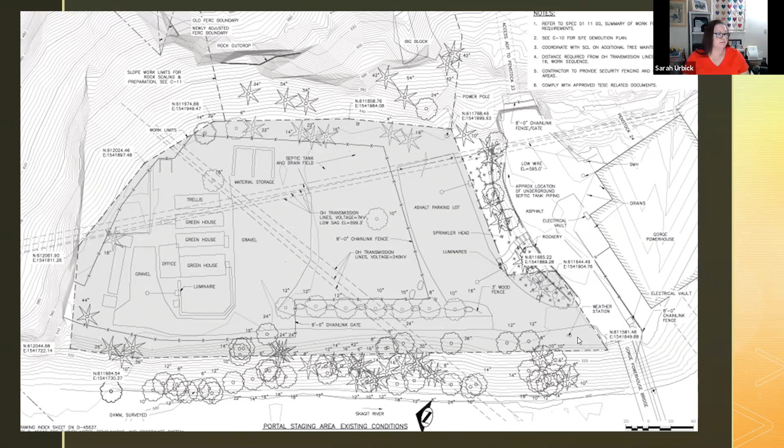All right. So I just have a quick question. I keep happening to notice that there's shading sometimes underneath on the map. So does that convey anything? It can. It definitely can. We'll look at a variety of maps. If you have one particular in mind, let me know. Let's try and bring it up, and we'll talk about that one on the screen. Okay.

Talking about visual concepts, it's really hard to do this 2-dimensionally, right? But this is ultimately what we're doing. We are taking an existing structure, an existing geographical formation, whether it is a parcel, whether it is a mountainside, whatever, right? We're taking it, we're slicing it into these pieces, kind of like a layer cake or a tiered cake, right? Cutting it into pieces every 100 feet.

We're going up and cutting off another slice and saying, what's the area right there? Where is that spot? And then by compressing it into 2 dimensions, that's what we get: we get a topo map, we get our topography, okay?

As we looked at last week, I don't have any notes on my slides for some reason this week. We started out looking at this one at the end of last week's class session, okay? What information are we getting from this? What do we see? Looking up above, it's pretty easy to see. Yeah, we've got a hillside, we've got a kind of a gradual slope, we've got a steeper slope.

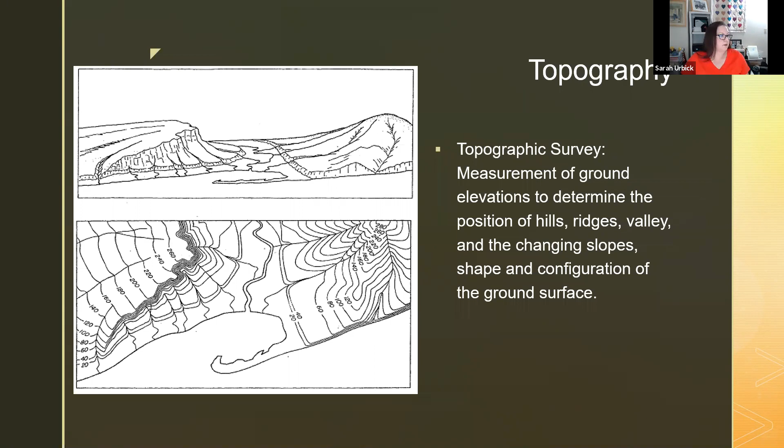All right. Contour lines, they will always connect points of equal elevation. Contour lines will never cross each other. You will have major and minor contours. Major contours, if you have to take anything out, you take out the ones in between, but you've got to have those big bold points so you have your frame of reference.

Not every topo line will have to be numbered. You won't have to put a call out on every single line, but you do need to capture the big points, right? There might be a point elevation that's worth noting, depending on the scale of your mapping.

Okay? And we want to know features of interest. Do we have a depression? Do we have an outcropping? What are we looking at? Is it a hill? Is it a slope? What do we have going on? Is it a depression? All right.

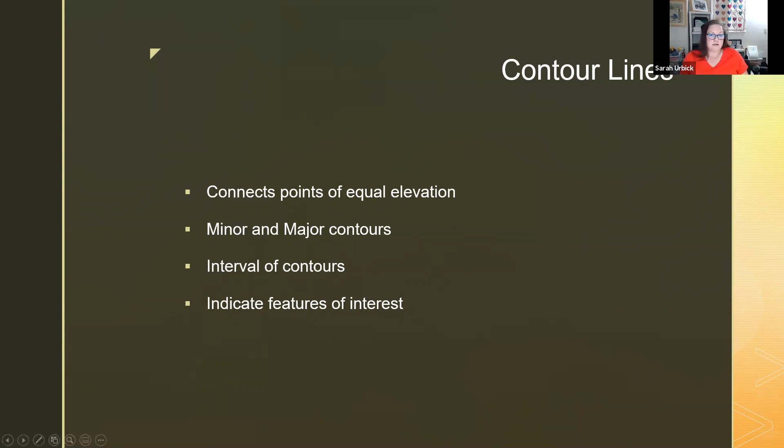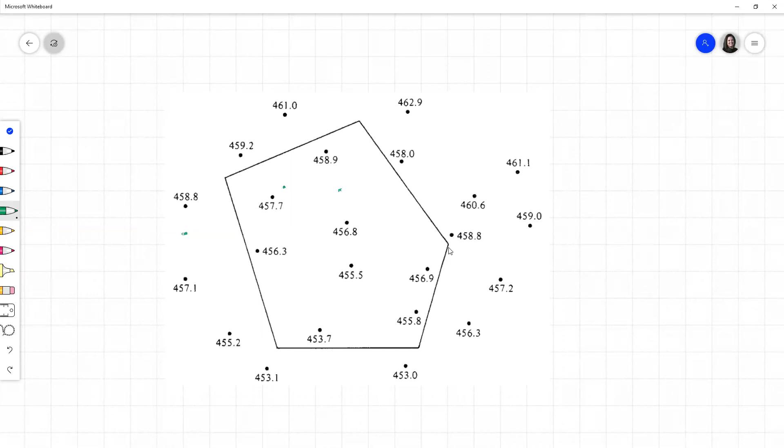And again, oh, no. How come you guys didn't stop me? I was on the wrong side of it. I was going to say that something doesn't make sense, but sorry, again, wasn't sure. I'm human too. We all make mistakes.

So it would actually be down in here, probably a little closer. 57, 58-ish right there, maybe. All right. And then somewhere between 57.2 and 59, that's probably going to be pretty close to the middle. All right. So I have my little lines.

Now, you guys have seen me draw lines. I can't draw a straight line to save my life. Let's see if we can kind of sketch in a curve using this technology, okay? So I kind of want to come in here, hit this green point, hit that green point. I have to come up and tag that 458. Oops. Okay. So this part's a little wonky, but you get the idea, right? So we've got one contour line in there kind of roughed in.

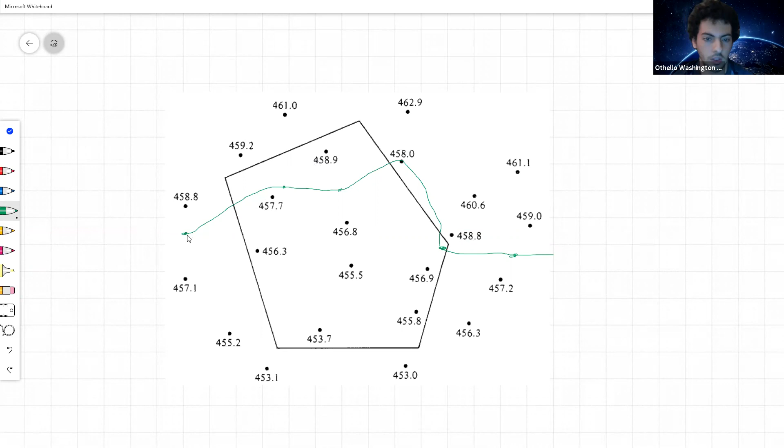So which way do you guys want to go? Should we go to 457? Should we jump to 454? What do you guys want to do next? I'd like to go down to 457 and just see how that works with the other contour line that we already created. Okay, so I'll do another one in red.

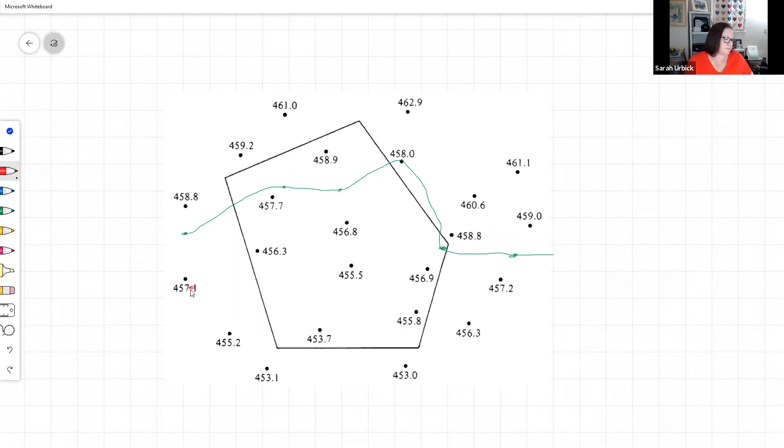All right, 457. Well, here's 457.1. So I would say if this is 455.2, we're going to be right about in this area between those 2 points, right? Similar here. So 7/10, 7/10, that's right in between. So we'll hit our 457 right there.

So here we'll start trying to connect these points. That was a little better. Okay. So now we're starting to see some finer detail emerge. This isn't just a big, nice sheet where everything's all at the same elevation. It's not all the same contours, right? It's not a nice flat plane from the side, right? We're starting to see that there's some undulations in it. There's some movement to it.

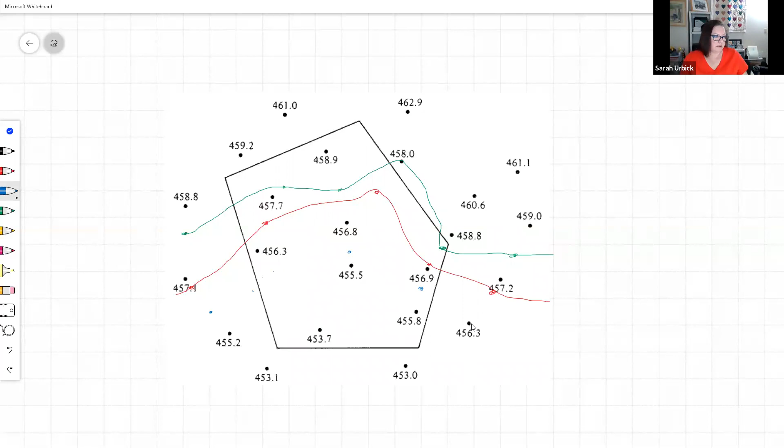456.8, 455.5. So we're going to be just a little bit closer down here. Put the dot there. About one whole foot in between these two. So about midway probably. Okay. And again, we're going to be pretty close to this 456.3 since the next one is 453. And if we look here, there's 2/10 to 456, and there's 3/10 to this point. So again, we're going to be kind of right in the middle.

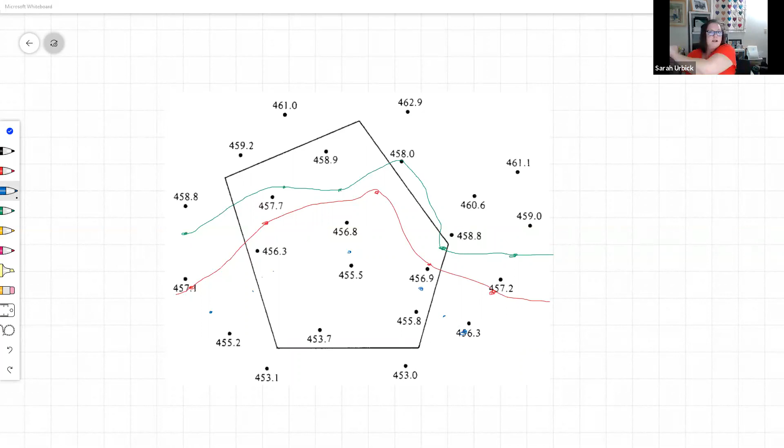So how many of you have done graphs with Excel? Probably most of you, right? Okay. So you can smooth out the line. You can hit every single point and you get this little jagged line. Or you can tell Excel, kind of interpolate for me, make that a nice flowing line. That's what we're trying to do with these points. We're just trying to smooth them out, except we don't have Excel to do the graph for us.

Okay. So let's connect these points coming in, sweeping. There we go. Rough and dirty. So again, my artistic skills are seriously lacking, but you get the idea. You guys want to do another one? Just giving you ideas on what we're doing.

Is it possible to do 453? Well, let's do 453. I think it is impossible with this set of points because we don't have more than one dot to connect it to, right? Since we just have the 1 point, let's just look at any 2 points. Between this point here and this point 453.7, let's go hot pink here, my dot's going to be right here. 456.3, 453, our elevation of 453, still right there. So right now, all we have is a point, and we know that things are headed that direction. That is our lowest point on our data set, okay? Our highest point here at 462.9.

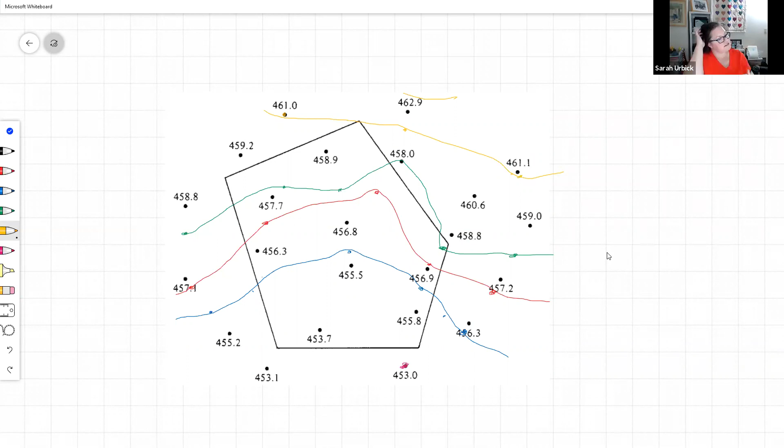Contour lines always come back to themselves, right? And it's a hard concept to fully grasp, because you're going, wait a second, we have lines that run off the page. Well, theoretically, that elevation doesn't go away, right? They're usually closed loops when we go out and we survey, because we're taking slices out of the earth. It might be a giant loop. It might be absolutely enormous.

Whether that loop closes on the page, or whether it's off the page, off the map, that contour still exists, right? That line in space, it's a flat plane. And anytime you cut something, no matter what angle you cut it at, that cross section is always going to be a closed object, right? Any questions? You guys want to do another one of these? Another contour? Or does my chicken scratch scare everybody?

No, it looks good. I was just wondering, what's the significance of the shape, this polygon in the middle? The polygon in the middle, that would be our traverse. Okay. So if we went out and had our setup and had our traverse to go back and find these points, that's just kind of like our control point. Does that answer your question? Is that what you were looking for? Yeah. Okay.

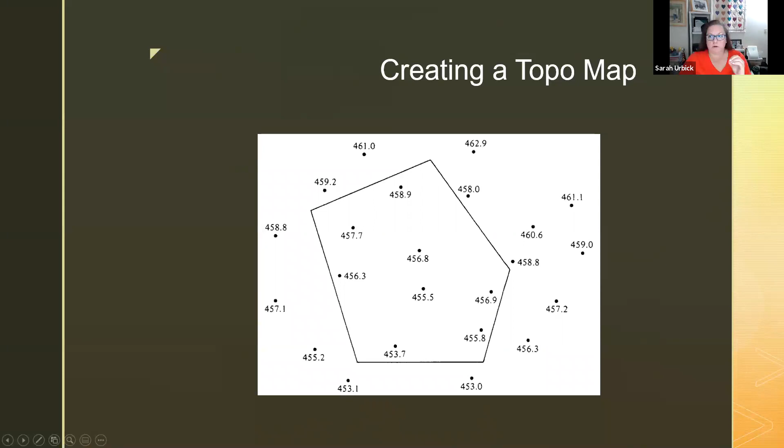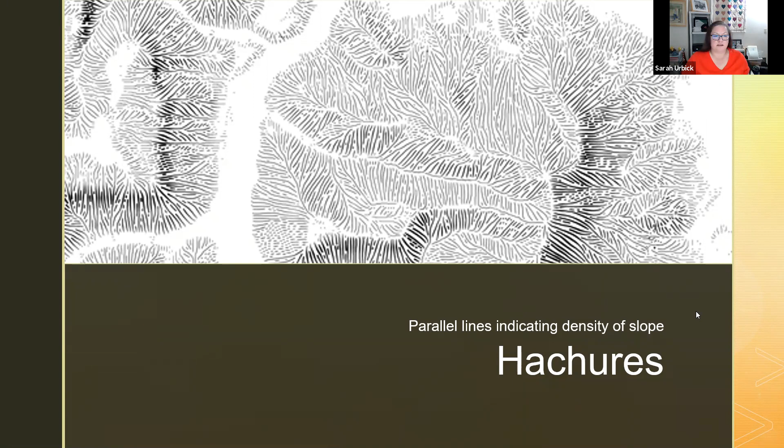You knew slope was going to come back to bite you in the butt, right? That's why we kept going over it and kept going over it. Slope percentage, slope ratios. How do we define what's happening to that piece of land? So what are our knowns? What do we have? The change in vertical elevation. That's what topo lines are. That's what our contours are. Horizontal elevation above a datum, right?

The change in elevation is 10 feet as defined by our contours. We know what our scale is, and thanks to that handy dandy chart that we had from last week, we also know that that's equivalent to 1 inch equals 200 feet. We know what our change in horizontal is. We measured it 3/4 of an inch. So how do we find the slope?

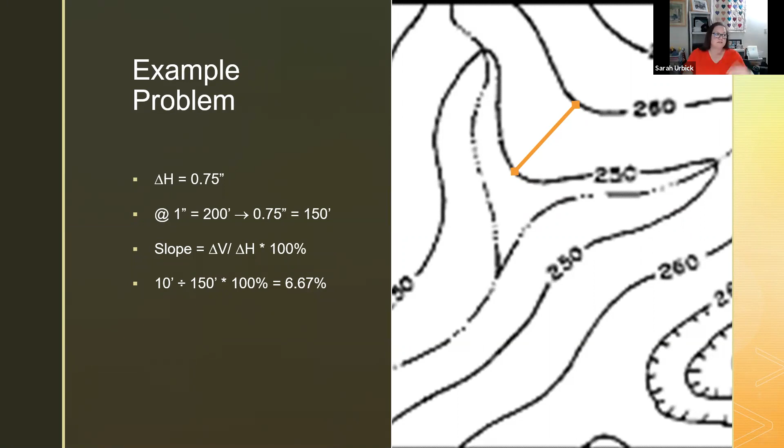That's mostly what we would be doing with these kinds of problems, these kinds of contours. What's the slope between this? If you measure from here to here, what's the change in vertical elevation? Okay. Little word problems that we would end up getting into. Topo maps and topography maps, they can be large, medium, and small scale. Now, this is where it's going to be a little bit confusing, all right? So let me get to my notes here on this particular one.

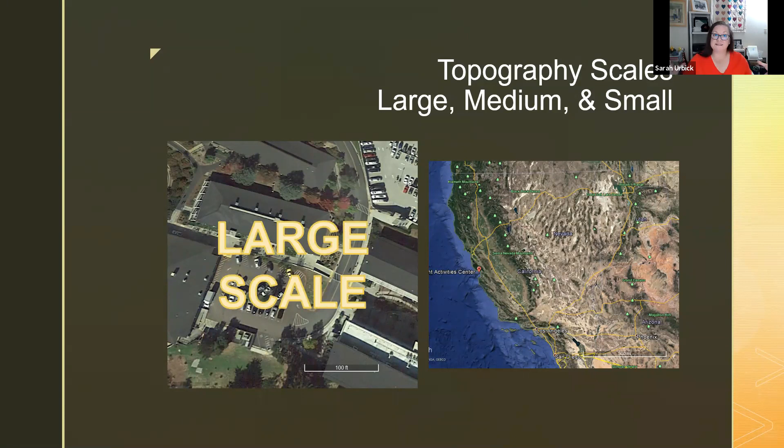So we have our large scale here on the left, where we're zoomed in, versus our small scale, which is when we're zoomed out. So the difficulty here is you're looking at a much larger area, but the scale really is much smaller. Does that make sense? That one took me a little bit to kind of wrap my head around. Okay. So the three things you want to remember here: small scale, 1 inch equals 1,000 or more. Large scale, 1 inch equals 100 or less. And medium, right in the middle. Everything else. Okay.

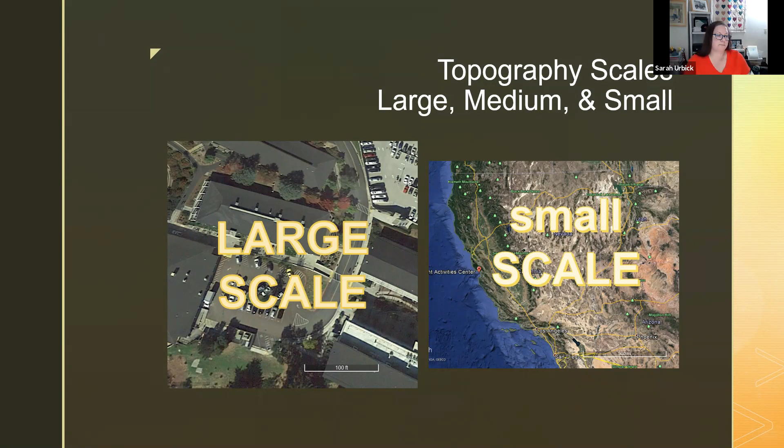Generating topographical data. So far what we did, that first problem, drawing in the contour lines. Somehow we've got to go out and get that data. This time we were given that information, those sets of points. Couple ways of going about it. There's a direct method and an indirect method. Direct method is I go out and I set up, I take my rod and I look for those points that are exactly the contour elevation that I'm looking for.

So if I were standing on that hillside, the one we were looking at, 400 versus 450 something feet, and I wanted to go find that exact line, I could go out, set my rod, take my reading, and come up with an elevation of 457.7. Okay, well, if I'm trying to find 458, I know I've got to go up the hill a little bit more, but how much more? It really is the trial and error method, finding the direct elevation.

It's very convenient. It's very, very easy to draw your topo lines off of that, because all you've ever recorded are your whole foot increments, right? Or your 10-foot increments when you've mapped those out. So you take your position, you take your direction, you locate that point in space. Now we're locating the elevation of it. Now we found that spot. Okay. Direct method, very rarely used anymore. It's too time consuming. It's too cumbersome.

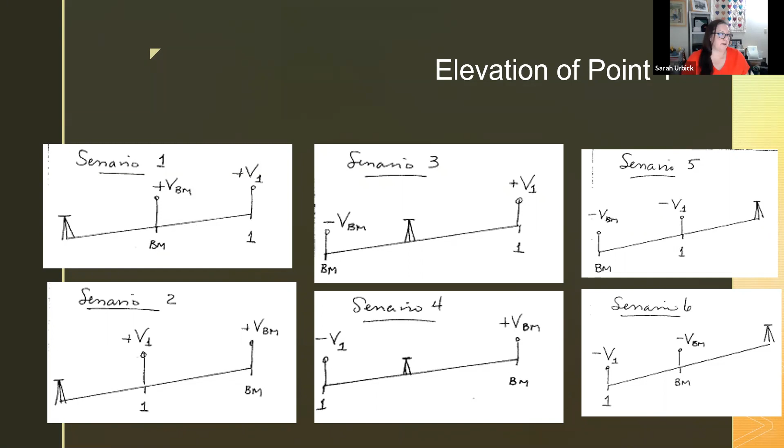That's really it, right? So what we're going to do instead, I'm not going to do that. The evil gears in my mind were starting to spin. I was going to just say, all right, scenarios 2 through 6, that's your homework, go. We'll walk through scenario 1. We'll talk about it, and we'll see if you guys want to continue on that. All right, so for now, let's go look at scenario 1.

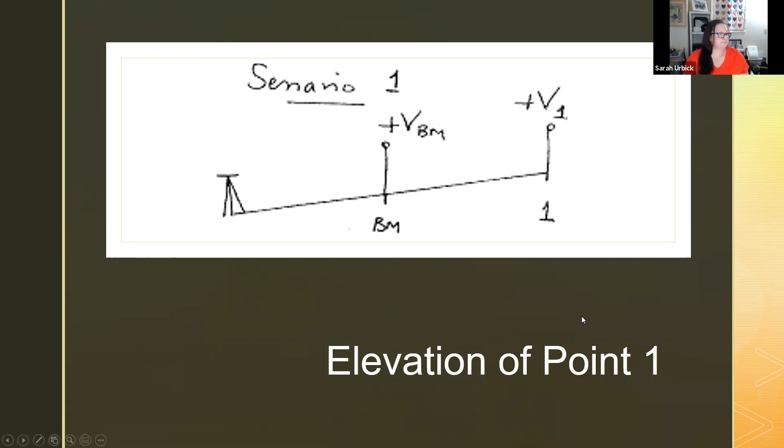All right, how do we find the elevation at point 1? What are our formulas? What's the math? All right. So we draw it out. HI is what? Okay, you're all going to have to chime in here. Height of the instrument. All right. Awesome. Okay. So we've got our elevations. RBM. What would that be? Logically, what do we think?

That'd be foresight benchmark. Reading at benchmark. Yes. Yeah, so that's going to be the reading at the benchmark. Okay. Actually, it's not the reading. It's the rod height. So the way this was set up, it's a little bit odd. So the rod at benchmark and the rod at point 1 are actually the same.

Okay. V at our benchmark, that's going to be our change from the top of our rod down to our reading. V1 is the top of the rod down to the reading. And what we're trying to find is this elevation 1, okay? It was a little bit funky, but the math ends up working out, okay? So if that were the case, what would be the formula for finding elevation 1?

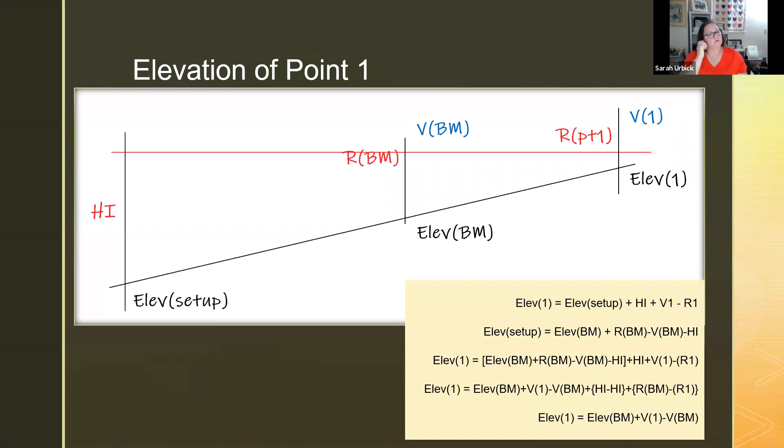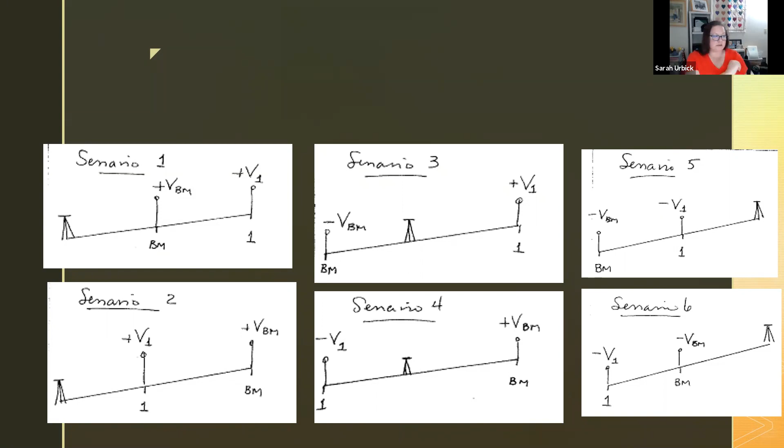What we were going to do was have breakout groups. We were going to go through and prove the formula. Now that we have 5 people, not going to work quite so well. I was really hoping to get the breakout groups going. But since we don't have that, do you want me to walk through some of these other scenarios? Or do you want to take my word for it that the formula for the elevation at any point is the benchmark plus the reading at that point minus the reading at our benchmark?

Whether our instrument is on the uphill side, our benchmark is in the middle, whether our instrument is in the middle and our benchmark is at one end and our point is at the other. If you want me to prove it, we can prove it. If you want to say, yeah, I'll accept it, we can do that too. What do you guys want to do?

There's some posts in the chat about doing one more and possibly number 4. Why am I not seeing that? Thank you, Marcine. Wait, we lost somebody. Oh, John. John disappeared on us.

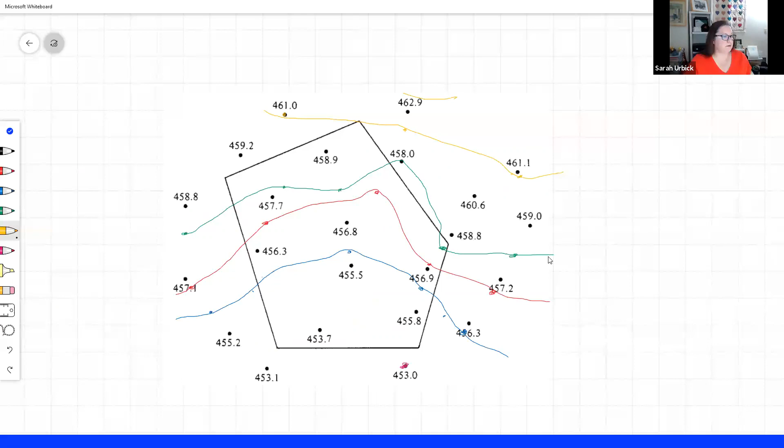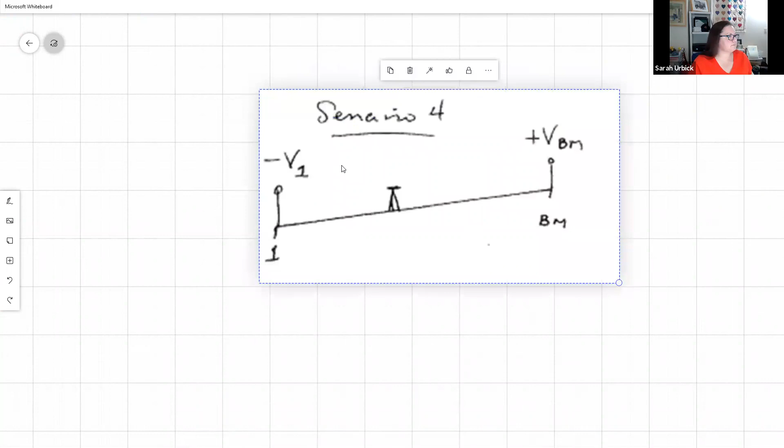All right. So scenario 4. Well, that sounds like fun. Let's grab scenario 4 and we'll just paste it on over in our whiteboard. Oops. Yeah, I'm one of those people, I don't clean off the whiteboard. All right, so scenario 4. So do we need to draw the lines, or do we want to start with formulas? Let's draw some lines. I'll use red so it stands out.

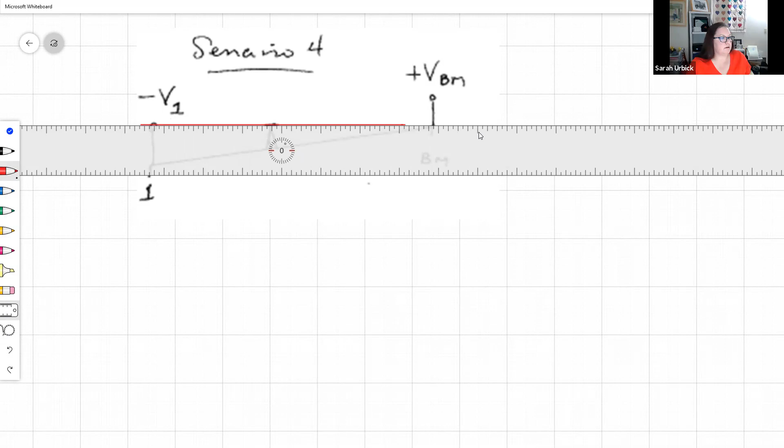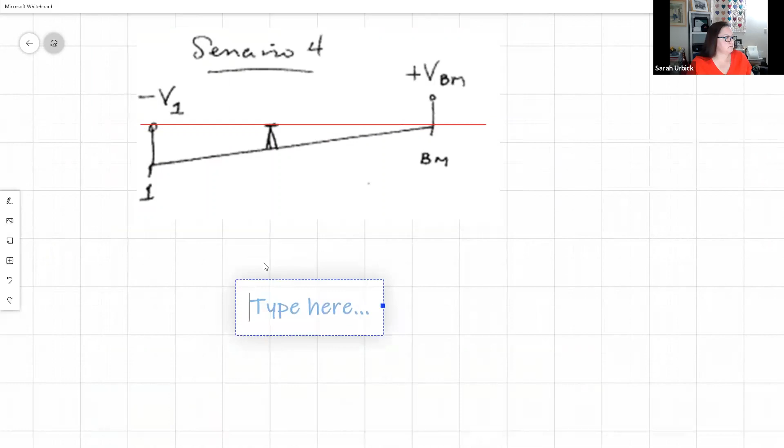So I have my height of instrument. So all my sights are going to be based off of that, right? All our readings. Let's see. I don't need to label everything here, but if I do this, oops. Why can't I get my text? There we go. All right, so our elevation, I'll just call it E1. We need our elevation at our benchmark. We have our reading at 1, our reading at our benchmark. What else do we have? We have our height of our instrument.

And then we have rod 1, rod benchmark, reading 1, reading benchmark. Okay. So let's put those in some semblance of order here. What we know is that our elevation at 1, we don't know the height of our instrument until we solve for it. So do we want to start with our elevation at 1? Do we want to start with our elevation at our benchmark and work backwards? Let's start with our benchmark.

Okay. So our height of instrument is what? It's our elevation at our benchmark, going backwards, right? So if we follow the path, starting with the elevation at our benchmark, we add the height of our rod, right? And here we would, hang on, we would subtract out the reading at our benchmark to get to this elevation, right? To get our height of instrument. You guys with me?

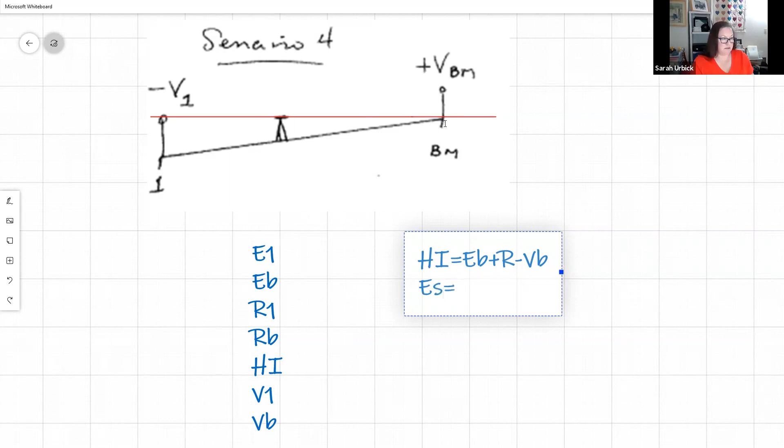Okay. So once we have our height of instrument, this one's a little bit tricky because if I use this drawing, reading the drawing, it's a little bit rough, right? So since we're dropping down, we want the elevation at our setup is going to be what? That's our height of our instrument. Is negative height of our instrument, because we have to drop down here. Actually, no. Sorry, okay. You had to pick number 4.

So this elevation, sorry, at 1. Hang on, what the hell? Elevation at 1. So we have to go up the distance of the rod, we have to subtract out our reading. And then subtract out... you guys are leaving me hanging here. It's not right either. Here's what we're going to do.

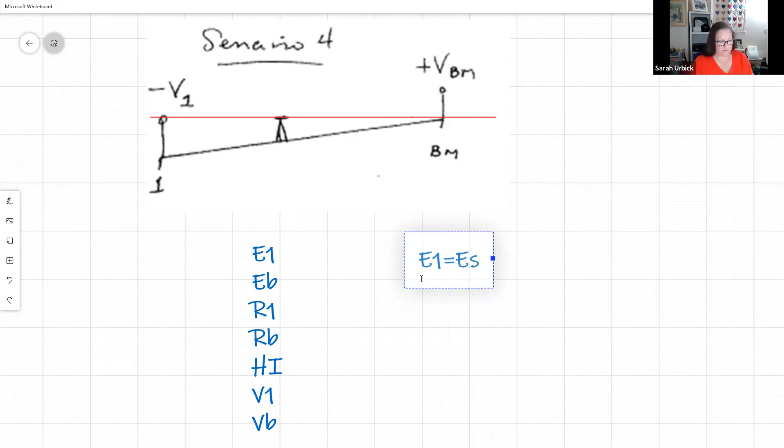Elevation at 1 is our elevation at our setup plus the height of the instrument minus the rod height. And this is showing that we've got a negative reading here. So we're going to subtract out a negative value for our reading at point 1. Okay.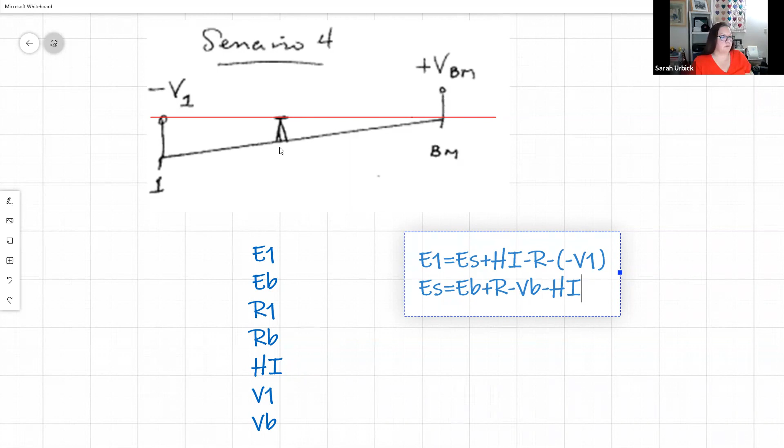What's the elevation at our setup? So where we have our instrument, right? It's our elevation at our benchmark plus the rod minus the reading at our elevation, our benchmark, minus the height of the instrument. So the elevation at our benchmark plus the rod minus our reading minus the height of the instrument. Just following that line and subtracting it out.

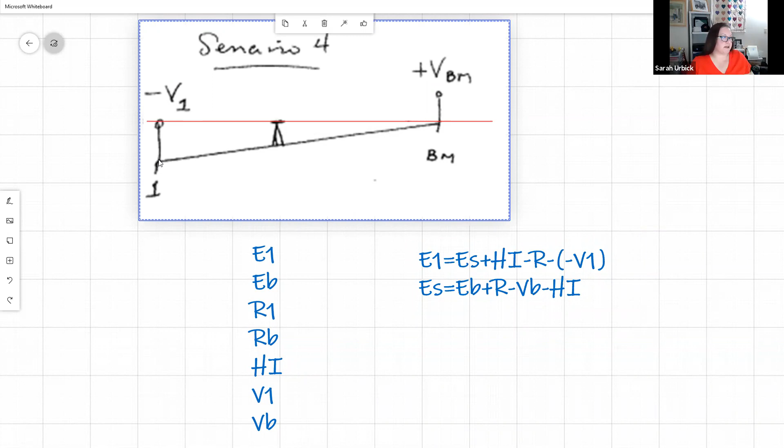But our elevation at point 1 is the elevation of our setup plus the height of the instrument, subtracting out the height of the rod and subtracting out the negative reading at that point. So we'll do our substitution. Our elevation at 1 is this, the elevation at our setup, right? Plus the remainder of that equation. I'm going to copy this down on this next line.

So let's do a little reorganizing. So subtracting out a negative turns that into a positive. We're adding the height of our rod. We're subtracting the height of our rod. So those two will end up canceling each other out. So we'll put those two together. We're subtracting the height of our instrument, but we're also adding the height of our instrument. So those two cancel. We're adding our reading at point 1. Oops, got an extra plus sign in there.

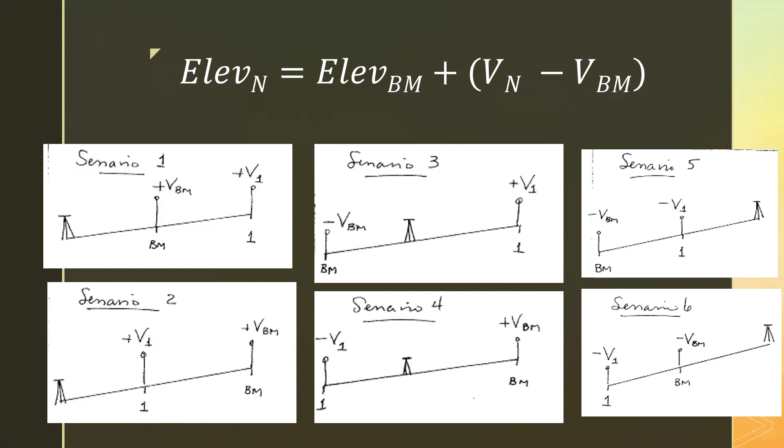Awesome. All right, so what did you guys think of breakout rooms? Helpful, hurtful? Do we need better technology to make them work more effectively? That's probably a given, but. It was kind of hard because we could only see each other, but we couldn't see the task at hand, so. Okay, yeah. All right, so we will work on that for future endeavors, make sure that everybody gets what they need. I'm gonna move the chat to another corner.

I was just a little confused because I was in the breakout room by myself. So you were all alone. Well, we lost somebody. Who disappeared on us? Anil left us. He was supposed to be in there helping you.

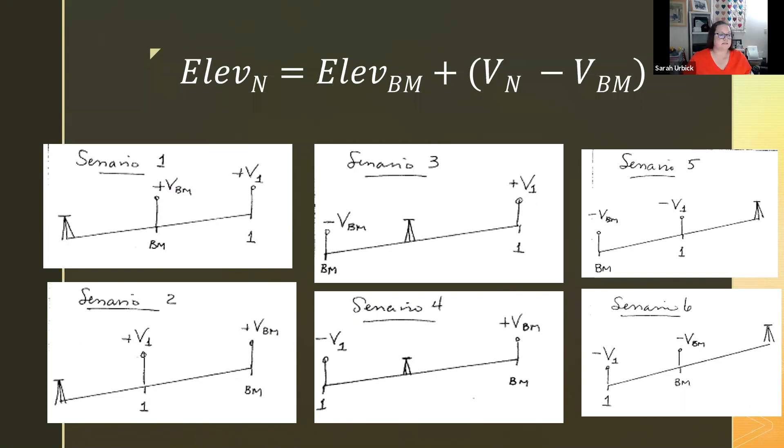All right. So did everybody manage to get to the cancellation of the height of the instrument and the height of the rod? Yeah. Okay. I like the head nodding. It works. All right. So what we have next is just kind of an introduction to earthwork and volumes. So we're going to talk about why do we need this information? What are we going to do with it?

So far, what we've done is we've looked at the mathematics behind everything that we've been doing, right? Starting the semester, we talked about trig, about geometry, and we looked at angles. How do we analyze angles? Then we talked about different nomenclature for slopes. Rise over run, using a percentage for slopes, using an angle to describe that, whether it is a horizontal angle in a horizontal plane, whether it's a vertical measurement in terms of angular distance, angular direction.

We talked about directions, right? In order to find any point in space, we need to know which direction it is and how far to go, right? So we covered horizontal angles, vertical angles. How do we adjust all of the above, right? How do we make sure we're looking at the right information? So kind of reiterating what our different situations were with differential leveling, we talked about how do we find the elevations at a given point, right? Given what we know, given the tools at hand, how do we find those elevations?

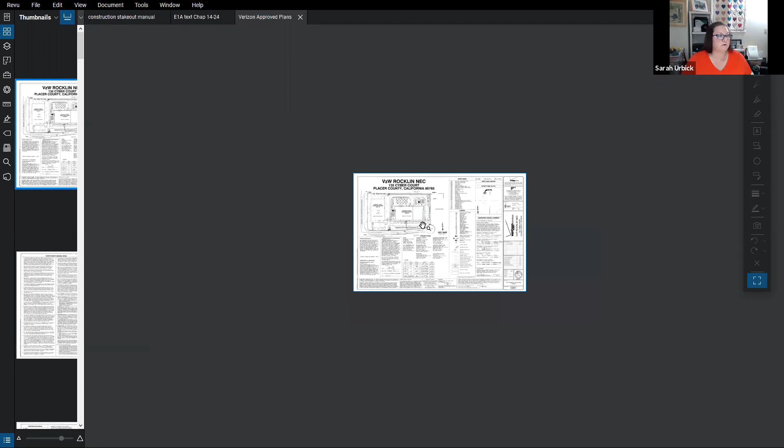So at 135 Cyber Court, Verizon Wireless Rocklin wants to build a data center. Proposed 2-story data center. It says it's about 118,000 square feet. So that's pretty substantial. That's about 2.5 acres, roughly. We have an existing facility on one side. We see that we have an existing street. Looks like there's going to be some improvements there.

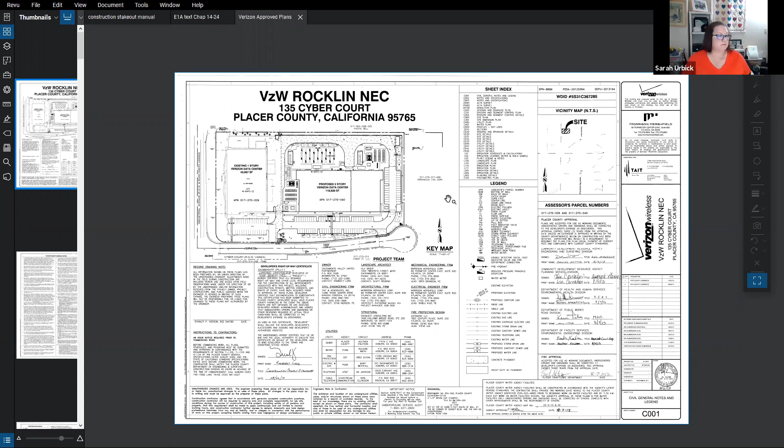Typical plan set is what we'd be looking at here. We have an index of what sheets are included in the plan set. What is our vicinity map? What's our overview? Our key map. And notice, even that is to scale. So if I needed to come out and take some quick dimensions, if I needed to rough in a number, I have a map, I have a scale, okay?

Enlarging and reducing this, I'm not seeing anything that tells me that I've got stationing, so I don't know that I could really use that scale to full effect, right? As I zoom in and zoom out, 1 inch changes how big it's gonna be. So something to watch out for with scales, which we've covered.

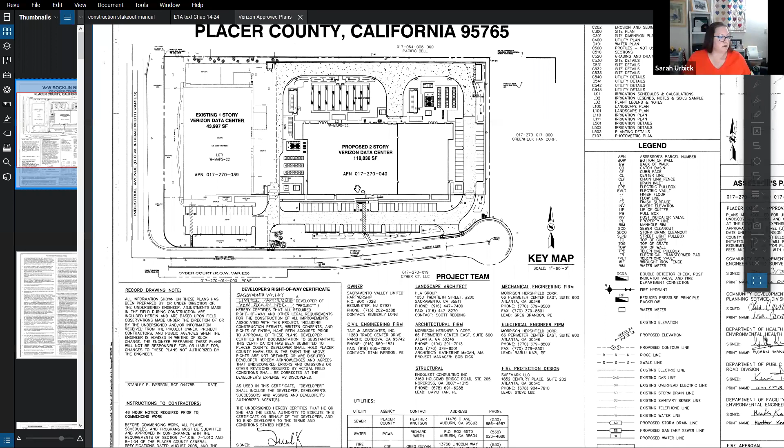Gives us some parameters. What are our neighbors doing? Who's our architect? Who's our owner? Who's our engineer? Has it been approved? You can't do anything without county, city, local jurisdiction approval. The engineer, the architect, who's the electrician on the job, all of that information. Who do we contact for utility information?

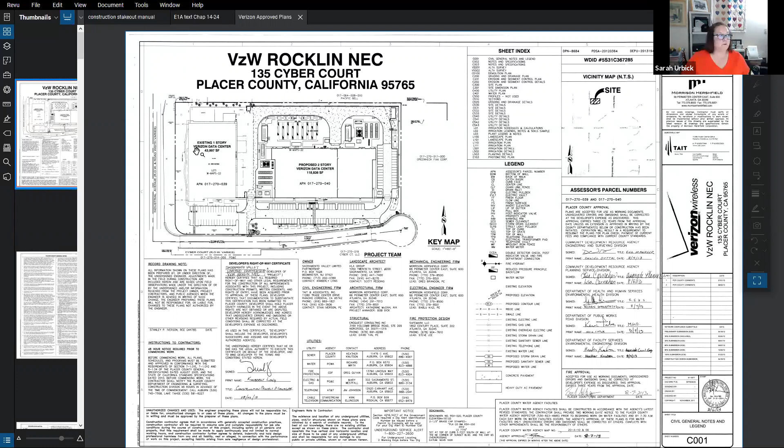We don't know. There might be a 12 kilovolt utility line running right underneath this site. Or, as they pointed out when we went and toured the existing facility, there could be a fiber optic line that would shut down the West Coast for all Verizon infrastructure if we hit it. Well, we're the dirt people. We go out, we dig. Stuff gets in the way. Where is your line? We don't know.

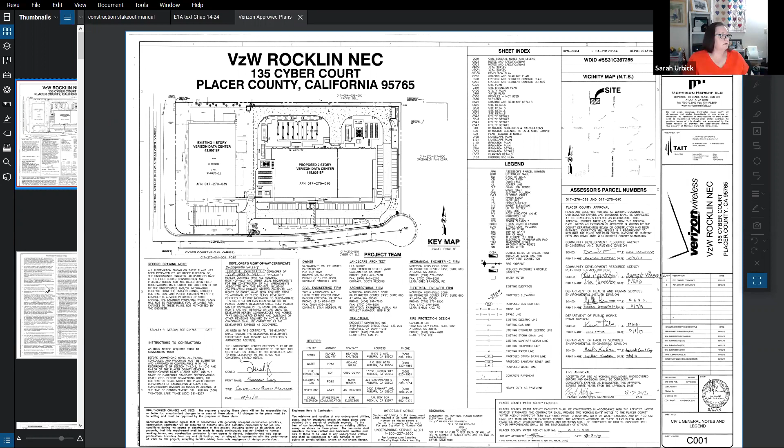All right, so this is going to be fun. Anyway, first sheet, this gives you kind of an overview, gives you a legend of what those symbols, what the details are, what the abbreviations are going to be. Page 2, more of the same, more details, more notes, which you would see if

my computer would work. I don't know why it does that. Okay, bear with me. Let's see, am I recording? Of course. Come on. See if this works.

All right, so basically it goes through a lot of notes, a lot of details about what are the specifications, kind of a quick overview of what are the details for the storm drain. What do we need to know about the sewer systems? What do we need to know about the water lines? What's expected of us? What agencies' details do we need to follow? Who are we contracted with? Those sorts of things. A lot of that comes up.

All right, so let me see if I can get, oh, there we go. Damn it, come on. Let's see, this is, if it would render quickly, of course it won't. All right, this is the erosion and sediment control plan. I'm not concerned about that just yet.

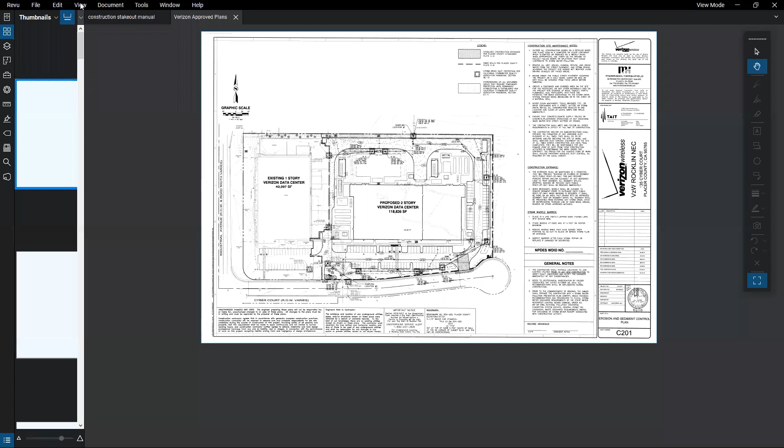Oh, come on. Come on. Where did I get that? All right. It's locked up on me now. I broke it. All right.

Okay. So specification notes. Intent, even details about the striping. What do they expect? What do they want from us, right? Legal description.

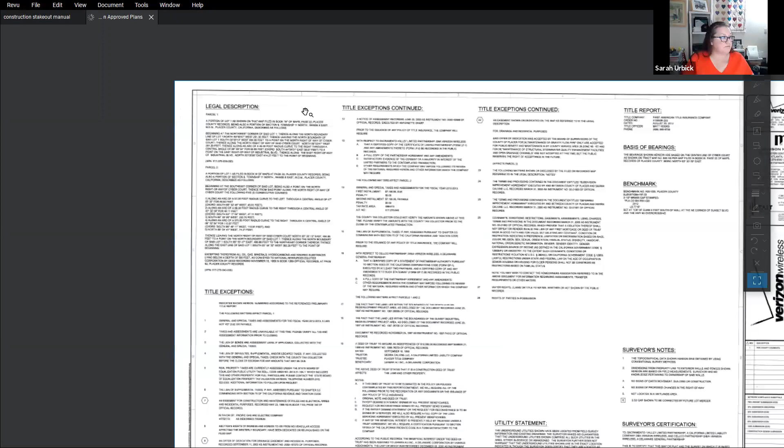Portion of lot 1, beginning at the northwest corner of said lot 1, thence along the boundary, northern boundary, metes and bounds. There it is. Plus, there's an assessor's parcel number. So if we need to go look up the property lines or the limits, we can find that. But it does give us that legal description of how do we define this property, okay? Parcel 2, portion of lot, blah, blah, blah.

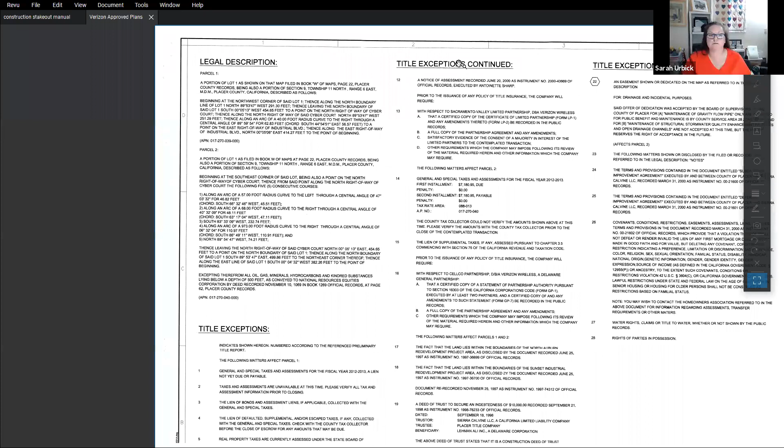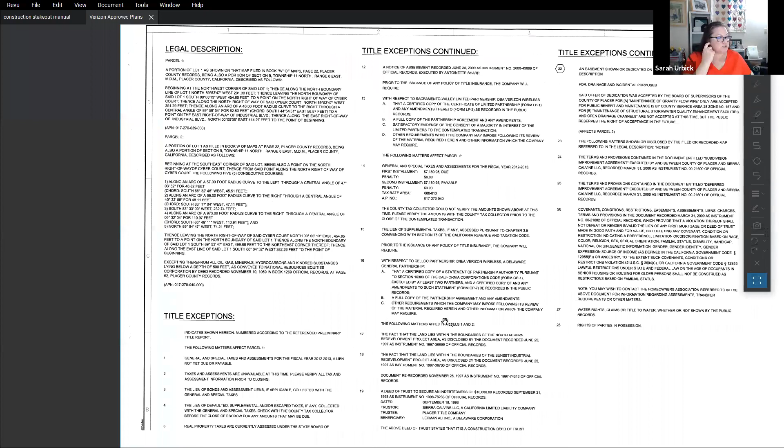Trying to be very careful. Surveyor's notes. Basis of bearings. What are my reference points? What are my knowns? Okay, where are my benchmarks? What do I have? What can I work off of? And then surveyor's controls. Who did the surveying? When did it happen?

Conventional surveying methods, dimensions are based on field measurements. We don't know who owns the walls. We're throwing out our disclaimer there, okay? No signs of earth movement, building, or construction, right? We see all the piles. We see the roadway that goes around there. Well, all right. To the best of my knowledge, at the time that I viewed the site, there wasn't a problem. Okay. Not located in a wetlands area.

You're going to run into that really a lot, especially in California, where the environmental controls are so stringent. Okay, there's certain areas, there's endangered species that you have to watch out for. There are environmentally sensitive areas, there's protected areas. Places where you can and cannot work during certain months.

So knowing what those requirements are, for example, going back to the Google Earth map, we saw that kind of waterway to the south of the property. That's something to watch out for. If we've got runoff, are we going to get in trouble for it? Yeah. If it ends up contaminating a waterway.

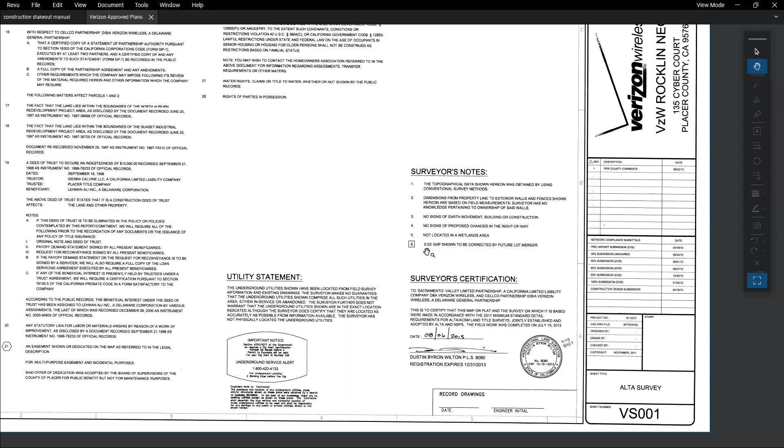53/100ths gap shown to be corrected by future lot merger. Okay, so what that's telling me is that something didn't line up. We have 53/100ths error of closure between two parcels. So that's giving us a heads up, right? And then the certification of the surveyor. All right.

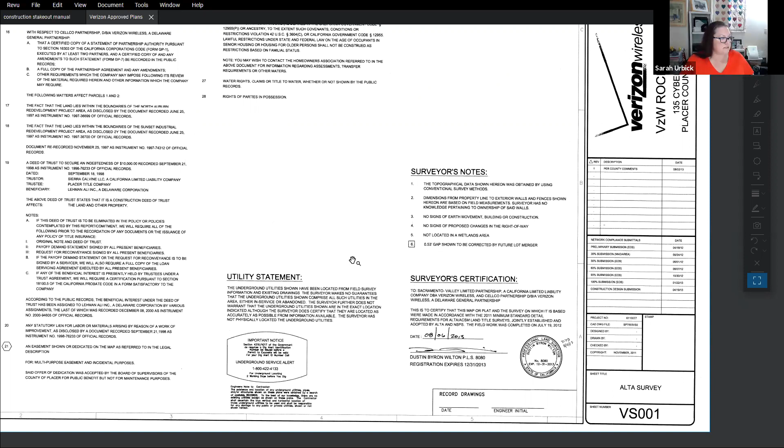Let's see if that'll work. Come on. Work with me here.

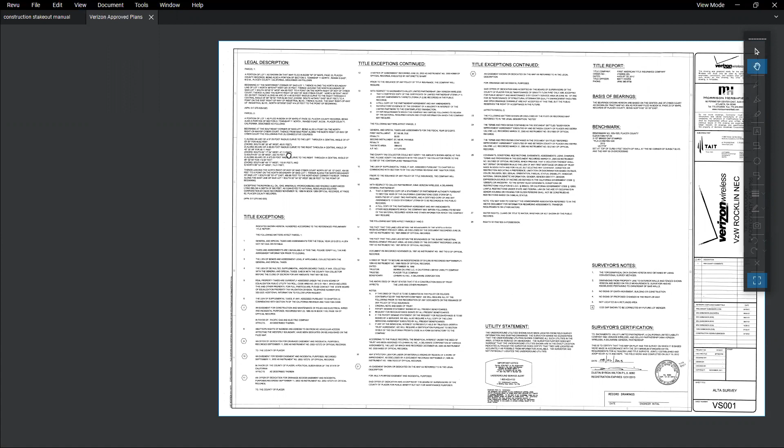And according to this, we have a 12-inch storm drain and an 18-inch storm drain dumping out right at that rock outfall. I see these contour lines that are showing me that I have a drainage swale. Okay. So this is how all this information ends up coming together. What are my existing conditions? What am I looking at? What am I building? Okay, how do we tie all of this back together?

I'm bounded on two sides, three really, if you count the road. I've got a little bit of opening here, but you can't legally drain your property and dump everything onto somebody else's property unless that water flow was already going there to begin with.

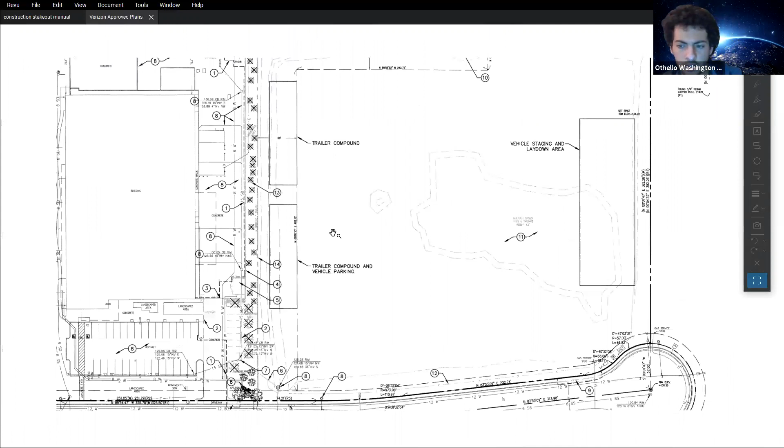Okay. And then there was a question in the chat from Mason. I'm just going to echo it. Are residential and industrial building codes the same annoyance in California? Annoyance, those are the rules we have to obey to do the job. There really is safety in mind, keeping safety and protecting the environment. Those are absolute concerns.

California can be pretty stringent, mostly because we're an earthquake zone. California tends to move a lot more than a lot of other states. So the soil conditions tend to play a bigger factor. The structural components tend to play a very large factor as well, just because of the nature of where we live and what happens to us. So, you know, areas where you've got strong winds or snow loads, those can impact regulations and requirements quite seriously. Mason, was there anything in specific you were looking for?

Were you talking about the difference between residential and industrial, or just in general? Is it just building and construction for residential? I was just wondering for industrial builds. I don't know about you guys. They're about the same. Yeah, that's what I figured. Yeah, pretty much the same requirements. Once you get onto private property, things change a little bit.

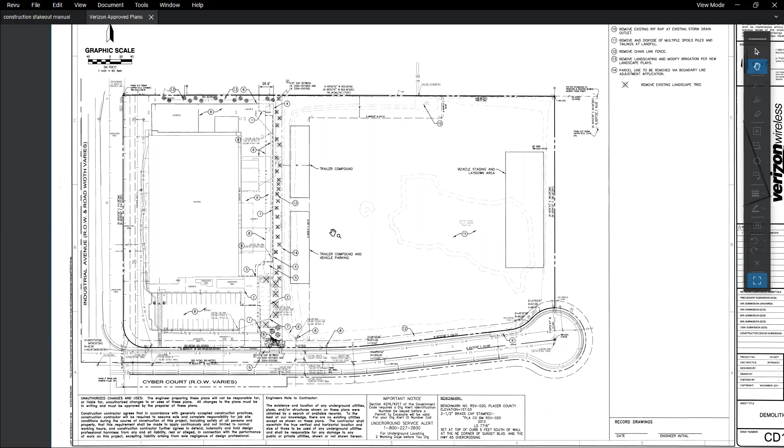Oh, yeah. And I'm guessing Placer County is a little different than Santa Cruz County, too. Around California, most agencies, most county jurisdictions, and down to the city level, most of the time they follow the Department of Transportation. They follow the Caltrans guidelines and specifications, and maybe have something specific based on where they are. Placer County is actually quite large. Pretty rocky, pretty warm conditions.

Santa Cruz, you've got the mountains, you've got fault lines. During earthquakes here in the Central Valley, we don't feel that often. So down closer to the fault lines, depending on where you are, you're going to feel something a lot stronger. So the specifications in Santa Cruz would address those conditions with more detail than Placer County would. So it can vary from county to county, but most of them stem from DOT work. That's pretty much the go-to.

All right. So here we have more benchmark information. It's a 2.5-inch brass cap stamped PLA CO BM R04-020 2012. Set at the top of curb, 5 feet south of wall at the northeast corner of Sunset Boulevard and the Highway 65 overcrossing. Not even on the site. So if I drag Google Earth back over here, here's Sunset Boulevard and here's Highway 65. Here's the site. So that's the closest benchmark.

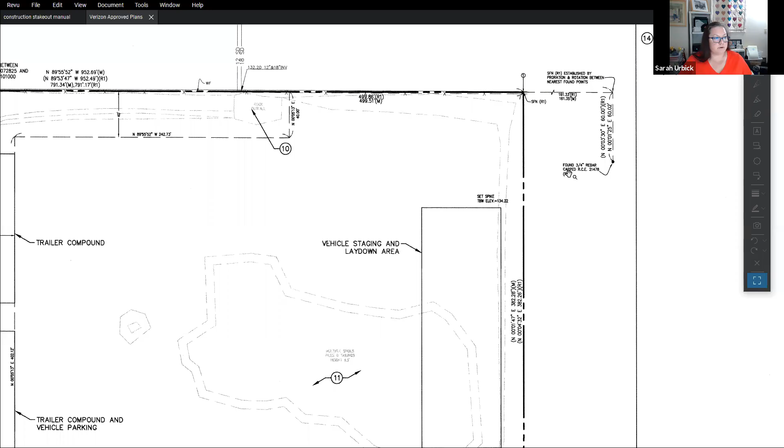There's a note here. So if I hide that and zoom in up here, found 3/4 inch rebar capped RCE. Okay, RCE indicating civil engineer, that would be maybe a temporary benchmark that somebody had put in. Okay, so that's the demo plan. It's pointing out that we've got a rock outfall, we've got dump piles, we've got a drainage swale, but we saw that from Google Earth pretty much. All right, so we're on the same page there. We're not looking at anything totally different.

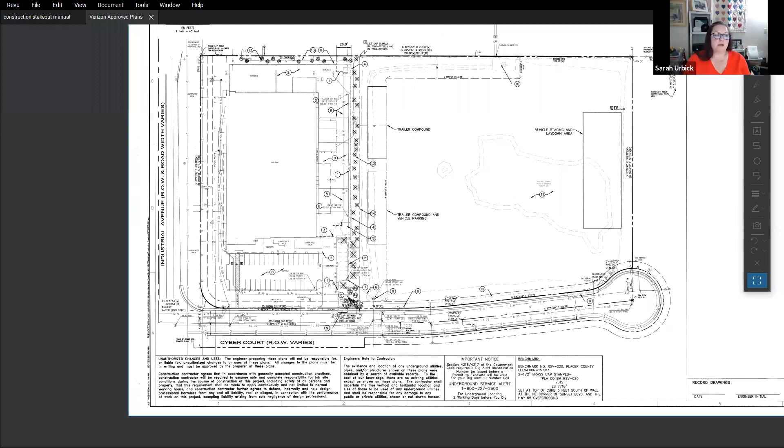This is the grading and drainage plan. So this is where engineers will marry up both the existing conditions and the proposed conditions. So what do we get from looking at those? So let me zoom in a little bit. Let's look at just the building pad for now, because there's a lot of stuff that's going on this sheet. It gives us an outline and we see little door symbols. Okay, so that's going to be our building.

It gives us some call outs, these dark black call outs. Those are proposed elevations. Our existing elevations we see down here, they're very, very faint. And these were scanned documents, so quality erodes over time. But here we see the outline of our spoil piles. We have a contour line of 135 right here down the middle. Notice how it connects back on itself. It doesn't cross any other lines. It follows all the parameters that we talked about earlier about what a contour line has. So here we've gone every 1 foot, 134, 133, 132.

So we can assume that with this peak here and down here where it says it's the toe of the slope, just like your toe, down at the bottom at the edge where it meets the ground, we're saying that it's about a 132-foot elevation. Okay, so 135 down to 132, they're saying it's about a 3-foot stockpile. That's a yardstick over the course of this whole area. Let me just tell you, they were wrong. It was way bigger than what that was.

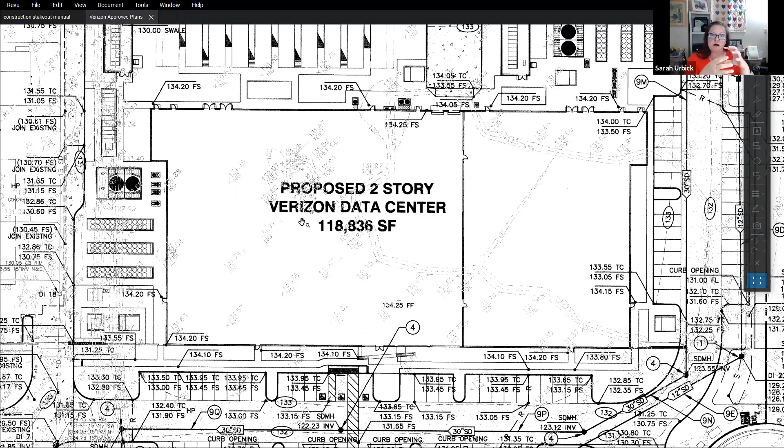That's not a big steep slope. And we're saying that this is almost 120,000 square feet, even without having anything else to go off of. We know that that's pretty level ground, right? No major hills, but we can see here as the points converge, as we start getting a whole lot of data all on top of itself, that's what the computer has been plugging in, right?

So it's recording all of that information, all those data points from the initial survey, and it's saying, hey, you got a hill here, you got a little bit of a mound. So we can get a lot of information off of this. It's a little hard to read. So usually what we'll do on the construction side is we will request the CAD files. So we're not drawing these by hand anymore. We used to have to do the volumes and the earthwork calculations by hand as well.

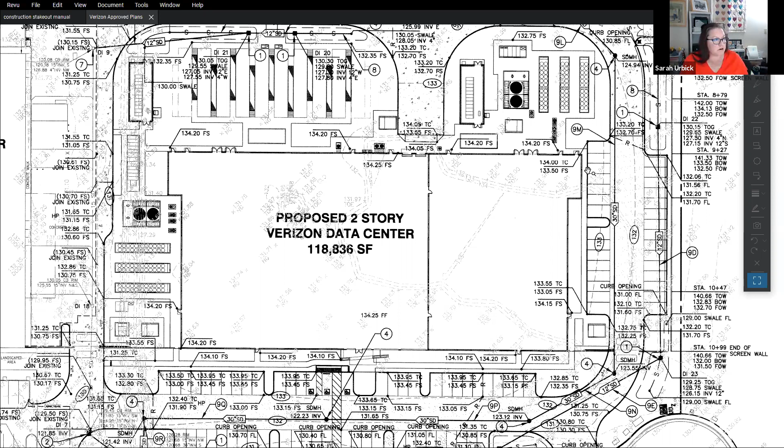But we will request those files so that we can lay them on top of each other, and we can let the computers do the difference. They can figure out whether I have to cut material out to get to my finished grade, or if I have to add material back in to get to my finished grade. So what we have here is, if we start looking at one of these little corners here, what this is telling me is that right here at the building corners, we're at about 134 finished surface.

So that's telling me that when I put down my aggregate foundation, and then I put down my concrete foundation with the rebar and the whole 9 yards, that we're expecting to get an elevation of 134.2. Well, if we're moving the earthwork so that we can accommodate 6 inches of concrete slab, 8 inches of granular fill material that we can verify is compacted, and we've got really good material down there, I have roughly 14 inches that I need to make sure we are below that finished surface, so that whoever's putting down that rock and that concrete can build that back up and hit that 134.2.

So really what we're doing is we're backing out those materials. We end up doing the same thing when we have asphalt paving. We have to back out whatever that material is to put our grade, our earthwork at that elevation. So that's what we need to do with this information: we need to take our existing, compare the proposed, and figure out what do we have to do with the earthwork that's here? What do we do with the material? And we get rid of these rubble piles, because they're not going to let us build on them, we don't know what it is, they've just got to go away.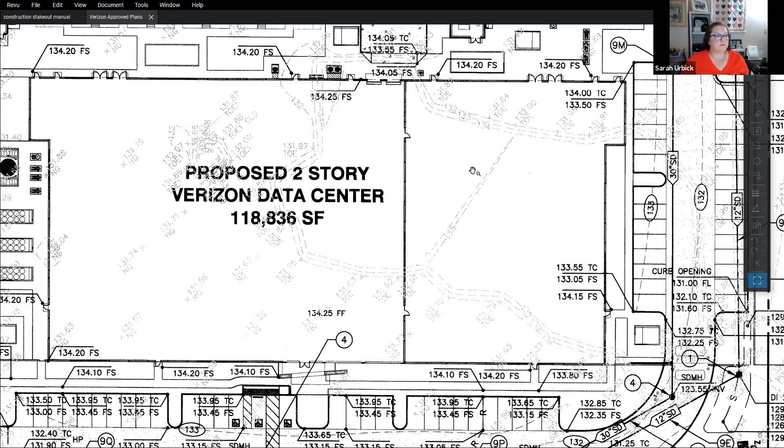So we can get really a lot of information off of this one sheet. But bottom line, what we're looking for, for our earthwork and for our volumes, is we want to take our proposed grade and our original grade and figure out where they line up with one another. If I have areas where my proposed is above my original, that's going to be a fill. I have to add material to get up to that new elevation.

The flip side of that, if I have original above my proposed, then I have a cut. I've got to remove that material to get down to that proposed elevation, okay? In a perfect world, the amount of cut that I have on my site and the amount of fill that I have on my site would be relatively equal.

And I have to say relatively equal because if you have ever dug a hole, you'll know that as you take the soil out of the ground, it expands. Okay. If you're trying to dig in really hard, really solid, really dense material, once you open that up, you don't have the same volume. If you were to measure out your hole 2 feet by 2 feet by 2 feet deep, and then measure the dirt that came out, that pile is about 3 feet by 3 feet by 1.5 feet. You're going to end up with different volumes.

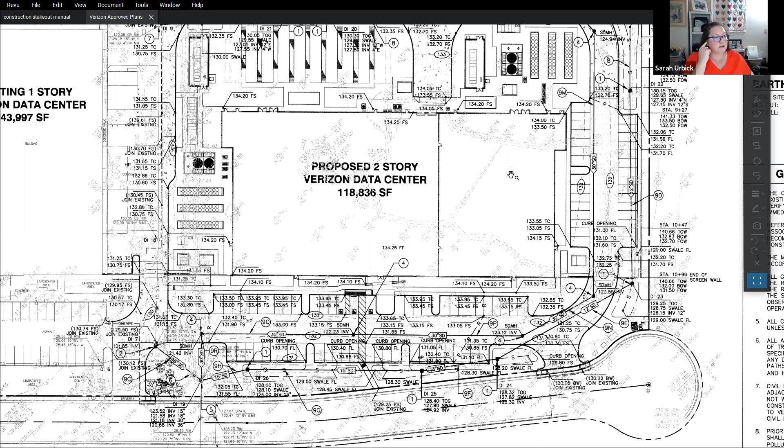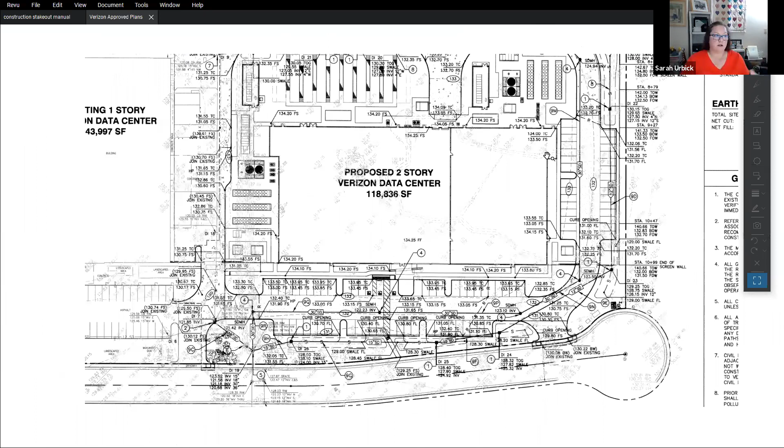Because it's wonderful when an engineer publishes, here's your earthwork quantities. You've got an 8-acre site, okay? Net cut, 5,370 cubic yards. Net fill, 6,297 cubic yards. Okay. So if I were to look at that immediately, the amount of material I have to take out of the ground, my cut, and put in my areas that are calling for fill, I need more fill. I don't have enough. If I just look at that, black and white, this piece of paper is telling me I need to bring in almost 1,000 yards more material to make my grades balance, okay?

There is a list probably about this thick of different conditions that blow those numbers right out of the water. Like I mentioned, soil conditions, moisture content makes a difference. What kind of material are we bringing in? What kind of material are we off-hauling? Is all of it going to be good material? What if I'm digging in a corner of the site and I hit a pocket of mud? There's a buried structure there that's been holding water for 20 years, right? So all of a sudden, now my numbers are different.

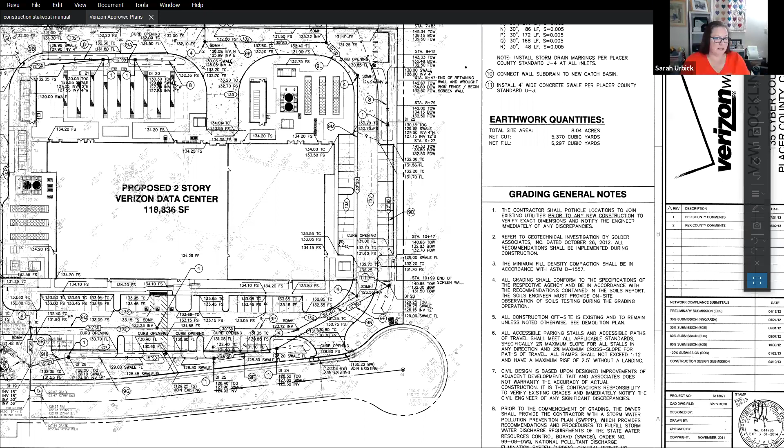This would be a difficult one to start with because of all the different appurtenances and all the things that are going on around here. There will be homework examples. This is just a very broad introduction to some of the terminology and information that we're going to be going over. Okay. Lots of different ways to go about calculating the volume that you're going to need.

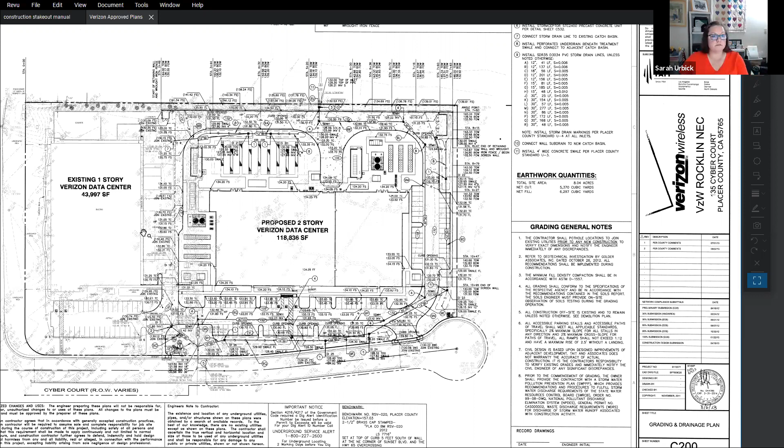Computer programs are great. If you want something like this, you could take the perimeter of this building and divide it into a grid, right? And you can look at the elevation at the corners of each one of those intersections and figure out your average difference between your proposed and your existing grade. And you could do that for little tiny squares by putting that into a grid format, okay?

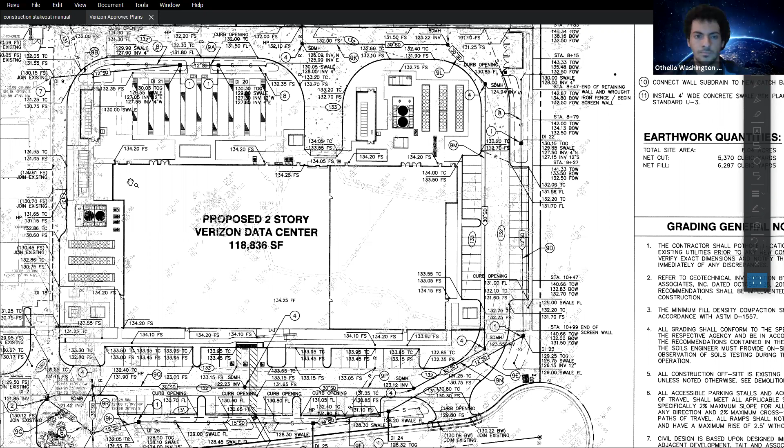So if we were to do 10 by 10 grids, 10 by 10 horizontal and vertical cuts across here, and figure out what the existing elevation is, what the proposed elevation is, and take the difference, we'd know whether we've got cut or fill on that building pad.

It is an extremely long and tedious process. Yeah, especially when you get out into the other areas. Roadways, where you have more consistent sections. So here, everything changes. Anytime you turn, things change. If you have a roadway, you've got a long, straight, linear, not necessarily straight, but you definitely have a much more linear project that you would be looking at.

There you would probably end up looking at cross sections. So instead of taking a square and saying, okay, I have this chunk of cake, right? I've got so much cake, I've got so much frosting. Those are my sections. What cross sections will do is that they will run a line across an entire area, which is really easy when you've got a roadway. So you go from the left-hand side of the road to the right-hand side of the road.

And when you have your boundaries like that, you might have a swale coming down on either side, coming back up. You've got a little bit of a shoulder, and then you have your roadway in the middle. So you can take that typical cross section and plot that against what the typical profile of the ground is doing currently. So let's take, let me see if I can come up with one that's pretty good. Let's take Soquel Drive right in front of the school, okay?

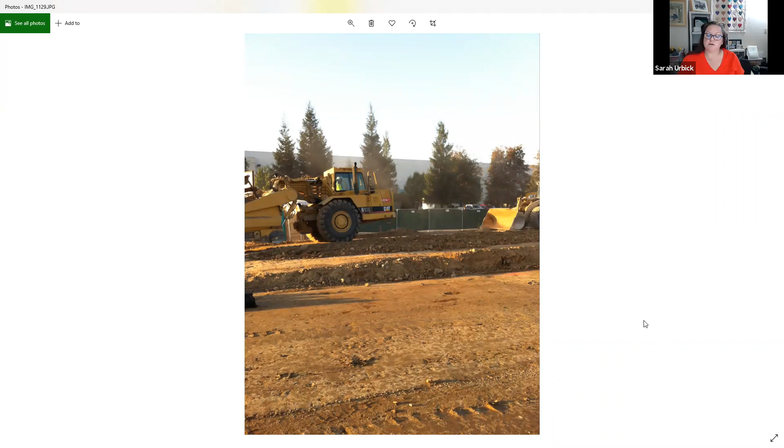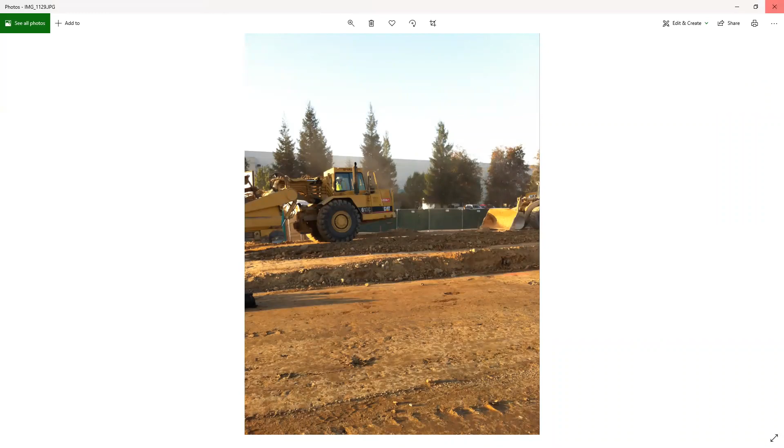right, so with that, exam 2, the rework, due Wednesday by the end of office hours. Homework number 7, the one that I forgot to post, I gave you until Friday at 5. So get that in by Friday, 5 p.m. Again, it is seriously 5 questions on scales. Most of it is math we can do in our head. So if you have any questions on that, do not hesitate to reach out.

Homework 8, topography, that's due next Monday by the start of class. Reading assignments, chapters 14 and 20. They're both very short chapters. They'll go pretty quickly. Next class, next Monday, November 9th. Yeah, topography is due November 9th. No, today is the 9th. All right, next class. Next class is not November 9th. Next class is November 16th.

All right, we'll continue talking about earthwork and volumes, and hopefully my guest speakers will stop being flakes, and we'll get them in so that you can hear somebody else's voice for a change. Reminder, office hours are Wednesday, 12:30 to 2:30. Most of the time, I just sit there and do my other work, or I surf Facebook. So please stop in, say hi, get some help. Message me if you got any questions, if you need anything.